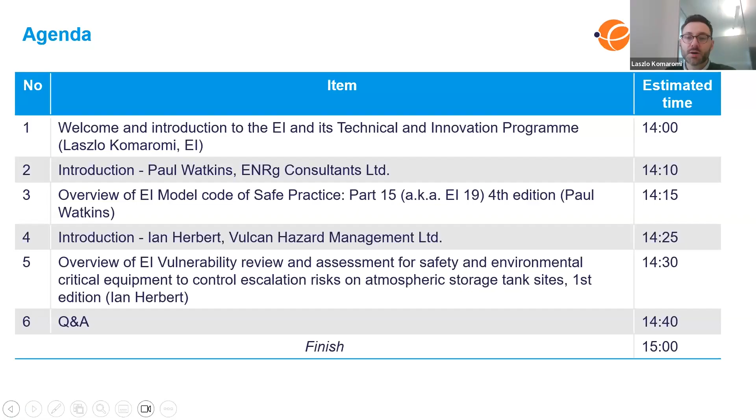Welcome everyone to this webinar on EI's Model Code of Safe Practice, Part 19, 4th edition, and Vulnerability Review and Assessment for Safety and Environmental Critical Equipment, 1st edition. These two guidance documents were published earlier this year, and I will refer to the titles as EI 19 and SECe guidance going forward.

My name is Laszlo Komaromi, Senior Technical Officer at the Energy Institute. I'll be joined by Paul Watkins from ENRG Consultants and Ian Herbert from Vulcan Hazard Management, and they will provide a high-level overview of each of these publications.

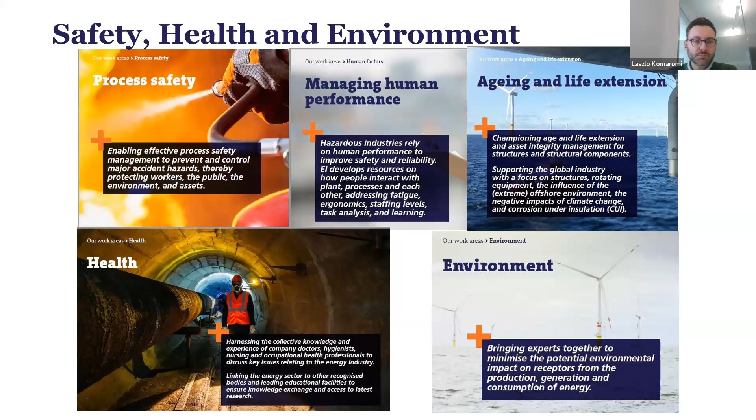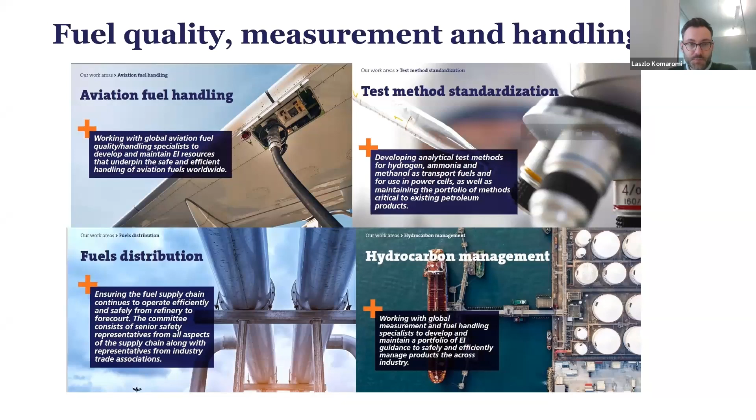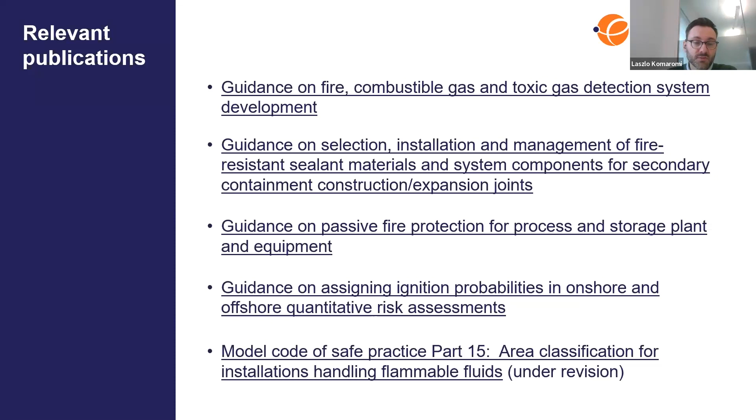They can be found on the EI publishing website, along with other technical publications. And finally, just some useful links for you if you would like to learn more about the EI and its technical products, training courses, membership opportunities. I've also included a link to EI's Toolbox platform, which is a free online resource that gives you access to learning from incidents and other safety information. So please check it out. That's the EI in a nutshell.

Over to you, Paul. Would you like to introduce yourself and tell us a bit about the fourth edition of EI 19? Of course. Thank you, Laszlo. As Laszlo says, a quick introduction. My name's Paul Watkins, independent fire hazard management specialist with ENRG Consultants. Throughout my career, I've been assisting operators in a range of different operating environments to assess and implement their fire and explosion hazard management measures.

That in itself is quite a big part of the document we're going to discuss today, EI 19. With the EI, I've been involved in this capacity, with this particular document, EI 19, really since its second edition, which replaced the old refining marketing safety code. It's really grown as a document - we've added lots of things in recent years. Some of that's come about through incident experience, changes in standards and design codes and those sort of things. Laszlo also mentioned a document about sealant materials for linear expansion joints in secondary containment walls.

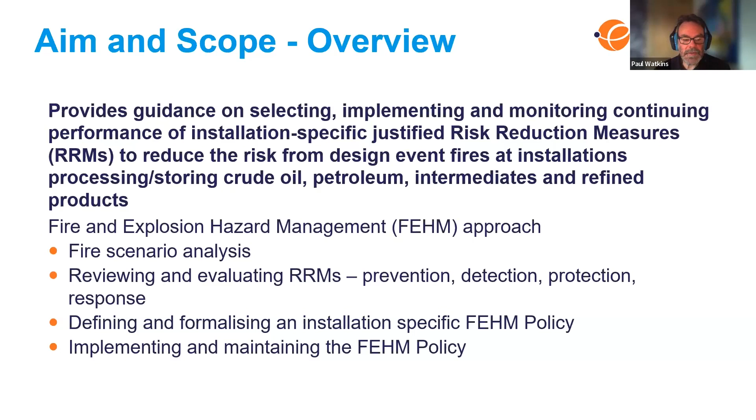This process can be used to help you define and formalize your fire and explosion hazard management policy. So in other words, as an operator, it can help you put that policy into place, to formalize it, and whether that sits in with the legislation in your particular operating environment, or whether it's something that's very installation specific, location specific.

We can use QRA techniques to help us analyze scenarios. Things like consequence modeling can be used later on down the line to sort of establish the potential consequences of incidents. But also incident experience as well, which is a very valuable tool in this process, because a lot of ways of dealing with incidents have come about through successful application of sort of fire response measures or systems and equipment that have been used to mitigate risks.

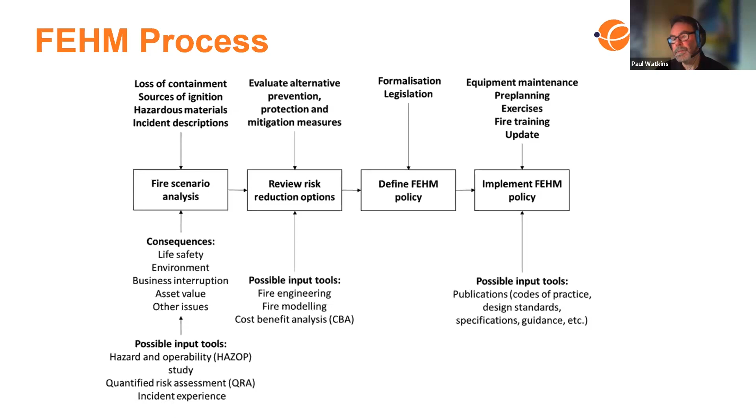So then we need to think about implementing those measures as part of our policy. As I said a few moments ago, things like equipment maintenance, pre-planning, emergency response planning, exercising those pre-plans, and also training personnel become very important.

There are lots of different guidance documents and sources of information that we can use, things like design codes and standards, which we'll come on to in a moment.

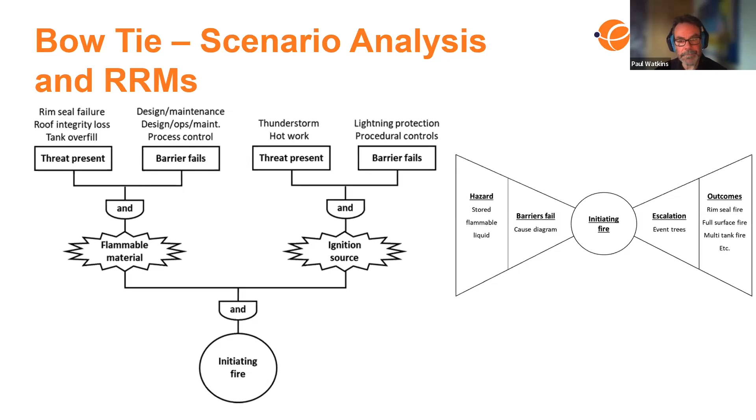In terms of ignition sources that may be present, the two things combined give a fire. We're thinking about things like, is there any hot work being carried out, and is that subject to permits? What about natural ignition sources, things like thunderstorms and such like? Generally speaking, we're trying to look at both sides of the equation - prevention of the loss of containment, prevention of the ignition sources, and the ways in which we can achieve that.

To that end, the document EI19 gives us quite a bit of information on all of these barriers to loss of containment, barriers to ignition sources, and then further on it gives us information on the systems, the equipment, and the procedures that we can implement to mitigate risk.

The document focuses on the selection and implementation of risk reduction measures, and it's important to recognize it's not a prescriptive document. The fire and explosion hazard management process really sets out good practice guidance and principles on those risk reduction options, to assist people like process safety engineers, safety advisors, designers, and emergency responders and planners satisfy pertinent risk drivers within this sort of goal-setting framework that is generally being applied in many locations worldwide these days.

So it's not prescriptive. The document isn't saying you have to put certain measures in place, but it's giving you the tools to assess whether those measures are good for your own situation. And if you consider that they are, then it's giving you guidance on how to implement them.

There are a number of sections on different things. It starts off with sections on the control of flammables, so we talk about things like atmospheric monitoring, flammable vapor detection, flammable gas detection perhaps would be one of those things. Good ignition source control practices, including things like permit to work procedures, maintenance practices, good housekeeping, and also installation layout.

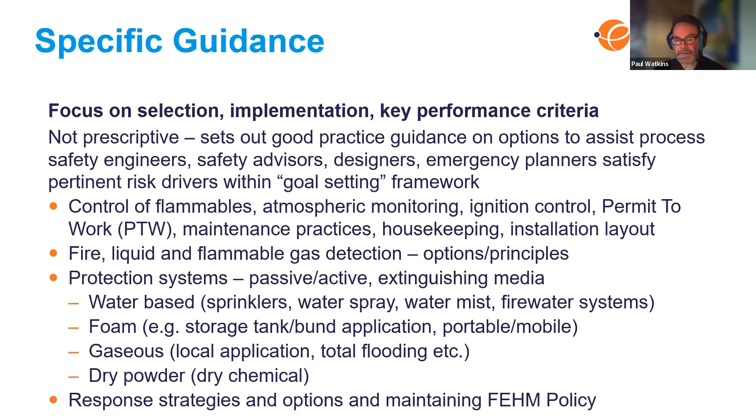Now obviously it's not just all about hardware, it's about response strategies and fire responders, taking into account that fire responders also includes operators as well, and the options available to you for various incident types are outlined in EI19. So there's some really good information on the sort of procedures you might be thinking about in terms of incident response.

There's a lot of supporting guidance for the various risk reduction measures outlined in EI19. First of all, a section on typical legislation and regulations, which sets the scene, the context through which the risk reduction measures and assessment thereof should be looked at, whether that's the COMAH regulations in the UK, the Seveso principles, or the regulatory reform order, that kind of thing, when looking at fire risk assessments for the built environment.

There's also a number of annexes on various topics, and some of these annexes are new, so it's important to know about those. The second and third editions included information on the fire-related hazards of petroleum and its products, talking about fire classification according to the EI classification, and flashpoints and so on.

But also now there's information on things like substances with a propensity to form vapor cloud explosions or result in vapor cloud explosions if ignited. And that really goes back to the post-Buncefield time, when those substances were first identified.

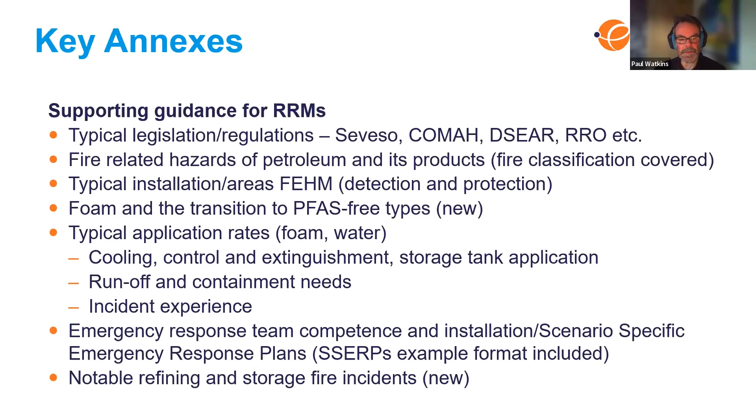The key changes in the 4th edition: first of all, the document is there to provide you with guidance. It assumes that good industry practice is already being followed at a facility, but it will give you additional information, additional guidance that you might need to make your fire and explosion hazard management policy more watertight, perhaps.

There's an increased focus on environmental protection, so a lot of good information on PFAS-free foams, containment options, secondary and tertiary containment options, and assessment of those. As I mentioned earlier, information on substances with propensity to form vapor cloud explosions, so a lot of the information that came out of the Process Safety Leadership Group post-Buncefield is included. Also new technologies are available on things like fire consequence modeling, particularly computational fluid dynamics for explosion modeling.

So if you're thinking about using that, or you're already involved in it, there are some key pointers. It's important to say there are also some local expectations as far as consequence modeling and scenario assessment, so we point those out in EI19. Things are different depending upon where you are in the world in terms of the criteria we apply, and EI19 recognises this.

There's information also on things like crude oil boil-over scenarios, which has been expanded for this edition, and updates on various risk reduction measure technologies across the full FEHM spectrum, particularly in incident detection, where realistically most of the key technological advances have occurred. New information on scenario-specific emergency response plans, things like containment integrity, and looking at the integrity of your secondary and tertiary containment options, with links to guidance including things like CIRIA C736.

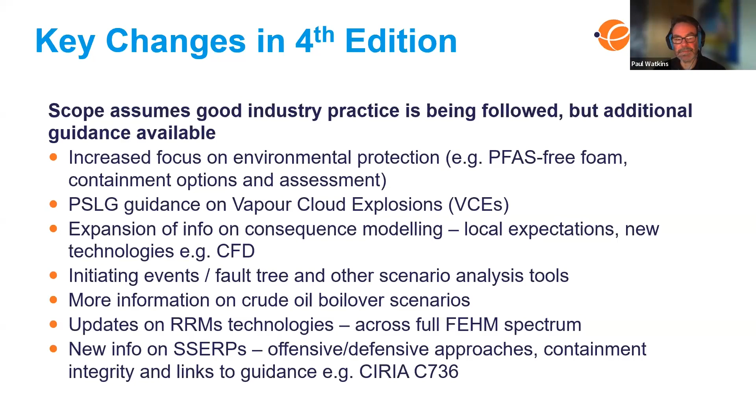So in summary, really the practical use of EI19, how do you use it to help you? You can use it to seek specific guidance on scenario development, risk reduction measures, or the FEHM, fire and explosion hazard management methodology. It gives you information on the key design guides, standards, approved codes of practice that can be used once you've selected your risk reduction measures, which help you design and implement them.

But really, EI19 sets out the methodology by which stakeholders, anybody who operates a facility or is involved with assessing facilities, can look at fire and explosion scenarios, compare those risk reduction measures, define their fire and explosion hazard management policies, and implement them. And once that policy is implemented, you can use EI19 to maintain it, including making sure your emergency response planning is up to date, that your competencies are correct, and that life safety, environmental protection and fire systems integrity assurance are all addressed.

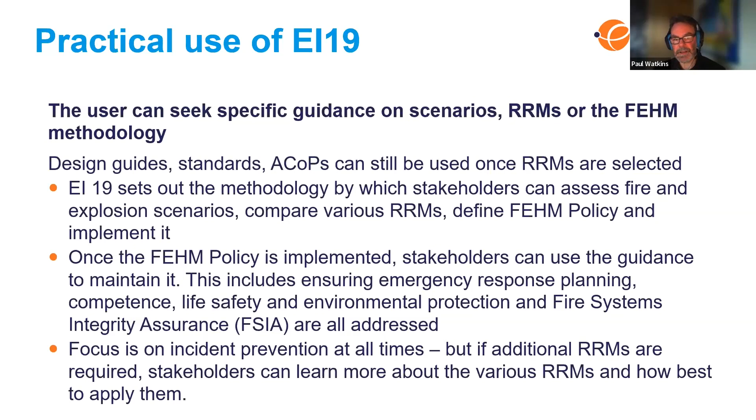I should say the focus really is on incident prevention at all times with EI19, but what we're saying really is if you need additional risk reduction measures to be implemented, if you require those, then you can learn more about those within the pages of EI19 and how to apply them. So really that's the sort of main practical use of EI19.

Yeah, thank you, Paul. Thank you. I think there was a lot to cover, and I think you've done a fantastic job.

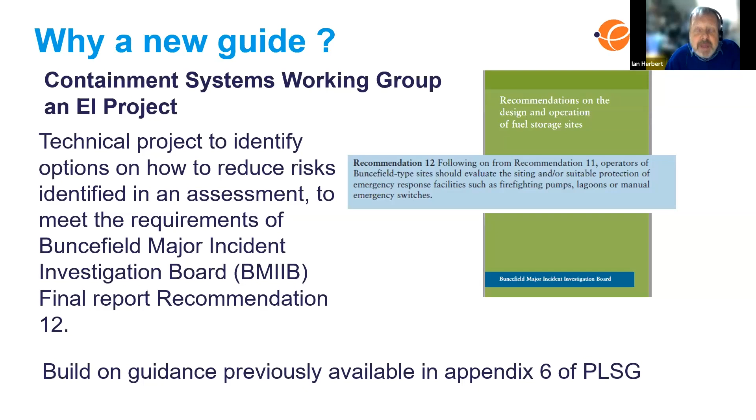So next slide then, please, Alistair.

So what we're looking at, following on from what Paul's mentioned, hopefully you've been doing your good FEHM studies, you've identified your fire hazards, and you've got a large number of systems in there. So we're looking at the standard type of fire equipment, fire water pumps, lagoons for water sources, deluge systems and other ones. But we're also looking at expanding it into other areas. It was not just the fire.

Sometimes we're looking at the bunds that you've used, because that's important for looking at pool fire type sizes, the detection cases, once you've had a loss of containment, access to those, and what exposed tank protection you might need, if any, to prevent escalation to those, such as from overpressure or fire spread.

So it's the equipment generally in there, but it's also to include the interaction from operators in the operation of that equipment. You might have all the best equipment in the world, but if you can't get the operator there to operate a deluge or orientate your monitor correctly, it's not going to work.

What's not being covered in this guide is the original loss of primary containment. So we're not looking at overfill protection primarily, but we are looking at what happens once you've had a loss of primary containment onwards.

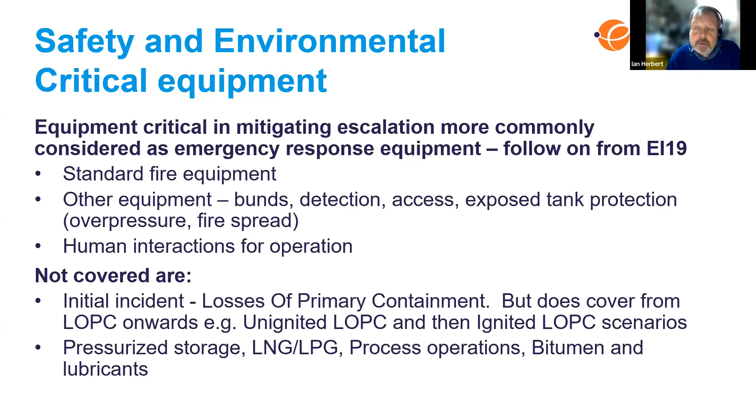We've used the term vulnerabilities to show failures of these safety critical equipment, and you'll notice I've used the small 'e' at the end, because many of you will come across SECEs in terms of safety critical elements—trying to keep this distinguished as equipment items. The main aim of the recommendation we were trying to address was the siting case caused by fire or explosion, thermal or overpressure.

But these are just siting failures with only one failure mode, that of survivability of the equipment to those events causing thermal or overpressures. There are other failures that can occur to these critical equipment items.

We're using the FEHM type terminology—people offshore will probably come across this in developing their performance standards—but it's the function of the equipment. Is it designed correctly to actually respond to the incident? So again, it's linking into what Paul's identifying in the FEHM in EI19, to test it and say, is it correctly designed? I'll come onto this in more detail in a minute.

The other ones are availability. Is it going to be reliable enough? Paul has alluded to this, with maintenance being a key failure mechanism, and reliability part of that as well. So availability—is it down? Have you got enough equipment items? And reliability—is it going to be working when you need it to?

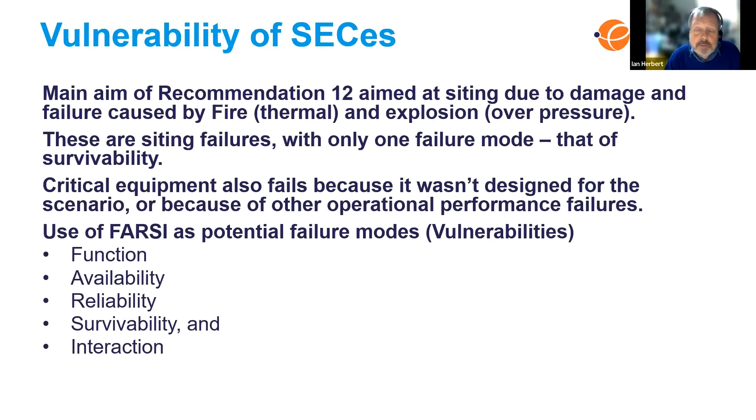So what we've actually done is grouped these into two parts. There's the survivability part, which is the key item we're addressing against recommendation 12, and then we've looked at these other performance vulnerabilities: function, availability, reliability, interaction. As I said, it's not just the physical equipment item, it's how we're actually interacting with it in terms of human failures.

Human failures in function include insufficient training, insufficient PPE so they can't get to it, insufficient knowledge of emergency plans—again, that's key from what Paul's been saying.

Availability in terms of their numbers present and time to mobilize. You might have an emergency plan, but is it designed to be operating with a certain number of personnel on site and emergency responders? Will it work at 2 o'clock in the morning? It's not just looking at your on-site personnel, it might be third-party off-site emergency personnel as well.

Reliability—can they be off sick? What do you do with that? What do you do if they're injured? In fighting the fires, thermal exhaustion can be a big case.

Survivability, we'll come into this one, factors in there. You might not just be affected by the thermal or overpressure cases, but also by the smoke and gases from a fire. So testing it on that.

Interaction - the big one there usually is breakdown in communications and compatibility with equipment and fixed systems, particularly when relying on external third parties coming in and tying into your emergency systems. Will it attach? They come in with 2.5-inch hoses, but you've got 5-inch connections because you've been designing it for a large fire water system - incompatible.

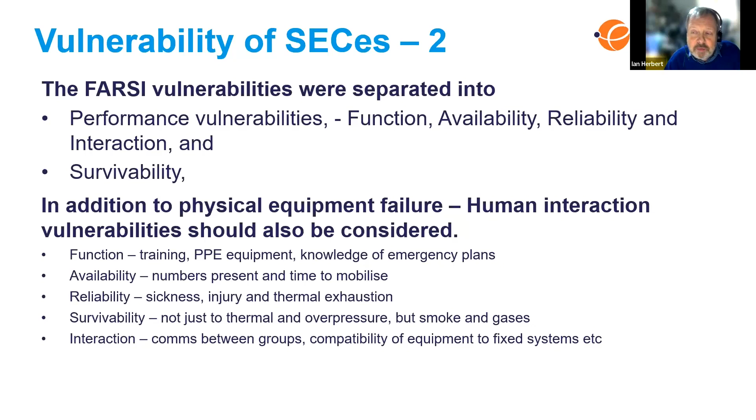A lot of this is developed from different stages, which is a key point. You're developing these equipment items from your fire and explosion hazard management systems, as outlined by the guidance provided by Paul in EI 19.

One of the cases was that the HSE focus, particularly in the PSLG, is largely based on the worst case. So they are panicking now about these large open flammable cloud explosions. But there can be earlier stages.

It can be a single tank fire or a single bund fire, and then it escalates to a multiple bund and tank fire. A couple of cases I can think of: Deer Park was an escalation of one tank to another, multiple tanks going through, or even back - if you remember - a Singapore incident with naphtha tanks, where you had an open floating roof tank that over time spread from one tank to another.

So large atmospheric storage tanks in particular can last several days and have multiple escalation routes, with a number of what I call stable fire cases in that escalation path, where you might want different levels of fire protection systems or emergency systems at those different stages, and I'll show that in a bit more. There may also be other cases presented by the stored material.

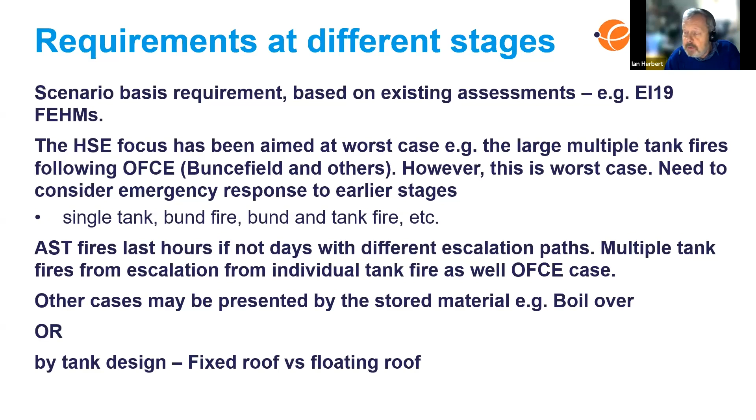Next slide, please. The guide has a number of route maps to show how you can think about escalation at different stages, and then the concerns at each of those stages, because there may be survivability issues associated at different stages.

You might also want to think about equipment needs on site for responding to smaller single bund, single tank fire cases, which you'll want to respond to as a sooner part of your incident planning, and then think about a larger loss of control.

It's escalated to multiple tanks, multiple bunds, and then you're getting the involvement of third parties, mutual aid groups, off-site emergency services, and what equipment do they need to respond to those bigger incidents.

So there's a lot in the guidance trying to establish what equipment and testing you've got at different fire stages, particularly for atmospheric storage tanks, which have been known to burn for several days and escalate over that period of time.

Okay, next slide then, please, Laszlo.

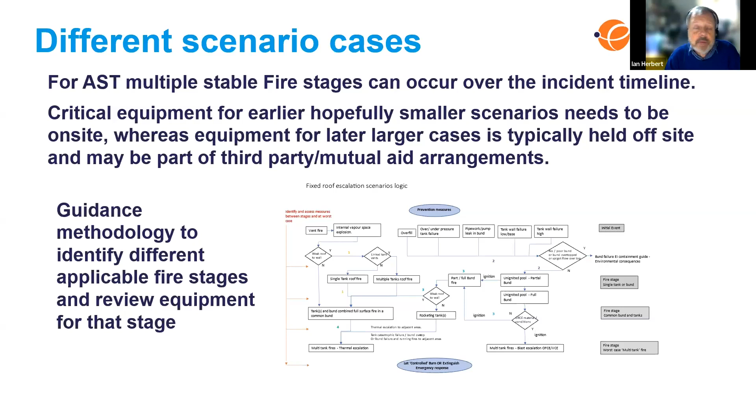That can be used to give you your thermal contours, and you're looking then at whether you've got equipment that could be damaged within those contours. So it's no good having a deluge location or a monitor position exposed to thermal damage to equipment, or also a thermal hazard to personnel trying to access that equipment as well.

So two parts of it - looking at these, there's a question about hazard ranges. One is, can you get escalation from a fire and explosion case that means you need to be thinking about equipment for larger events from those escalation events, and can the equipment and the human interactions survive those? So we've got ignited liquids and vapors, giving you thermal contours, and you've got overpressure and missiles from that.

You've also got smoke and toxic cases affecting human interaction or operation. Basically, on unignited cases, I've talked about EI15 area classification - that's good for normal operations, but has it been considered for an accident or a large case? Thinking again of Buncefield, the possible ignition source was the firewater pump house, which was outside standard hazardous area classifications. Maybe there should be consideration of where you place gas detection, perhaps at the entrance to firewater pump houses, to isolate or stop those operating for larger, non-hazardous-area-rated events.

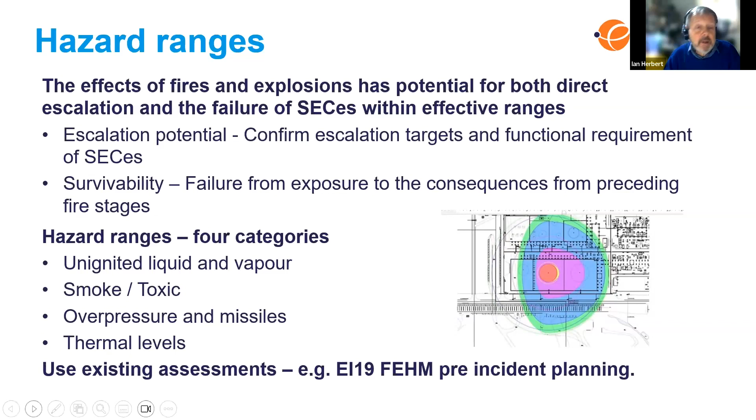So that's the hazard ranges - you're looking at whether it can be affected in terms of operation, or performance failures going through. Can it operate, or will it fail to operate in the set time? Again, thinking about your FARSI cases, and survivability against the hazard ranges.

Another survivability factor in the guidance now, increasingly important, is survivability against NATECH considerations. NATECH is natural events causing a major accident hazard - environmental factors like earthquake, landslip, and in terms of global warming, flooding, high winds, high solar events, long dry periods.

Buncefield was lucky because it occurred in winter. One of the firewater ponds often called upon was reported to dry out in summer months. So have you got firewater sources secure in summer months, or is it contaminated by flooding events? That's another survivability factor included in the guidance notes.

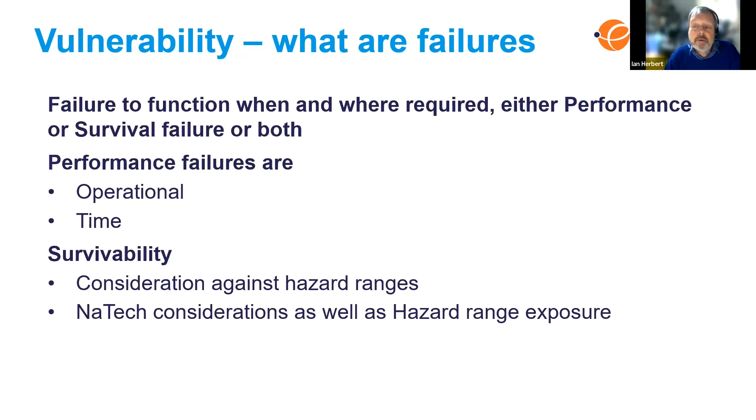Okay, next slide please, Laszlo. Moving on - once you've looked at these and determined whether they're acceptable or not, there's basically a risk assessment case for looking at emergency response plans. It's usually assessed against relevant good practice, for which you can look at the EI19 guide as a good starting point, and your emergency response plans developed through fire and explosion hazard management.

This is being tested now by thinking through the considerations within this guidance note. You're looking at performance failures - can these be resolved? Is it a maintenance issue, as Paul alluded to, or an availability or reliability issue we can pick up on? Can those be resolved? Is it a design issue for different stages? The design might be good for early phase but not good for a multiple tank fire case - do we need other systems to support it?

Survivability - typically, can it be relocated or protected? We might be stuck with an existing site so we can't relocate, but you could think about protecting those cases. If you've got these failures and they still exist, determine whether they're non-critical - i.e., low chance the equipment failure has much impact on overall escalation potential - or if it is critical, think about alternative equipment or emergency plans.

Some of those emergency plans for atmospheric storage tanks go up to and including let-it-burn. You might think we can control a certain number of fires, the smaller ones, but for the larger events all we're going to do is try to control it from getting any further and have a let-burn policy. Okay, next slide please, Laszlo.

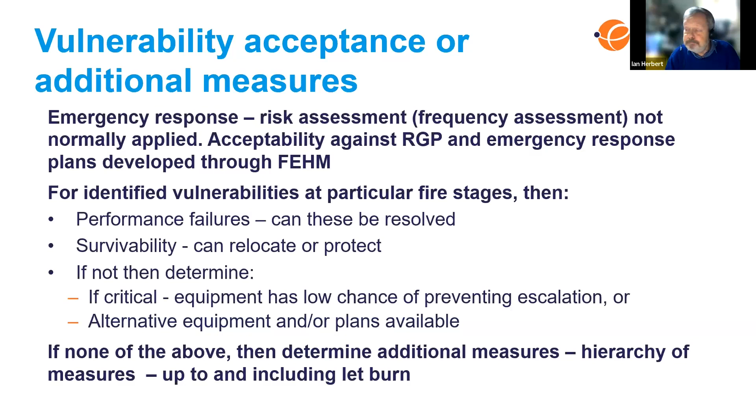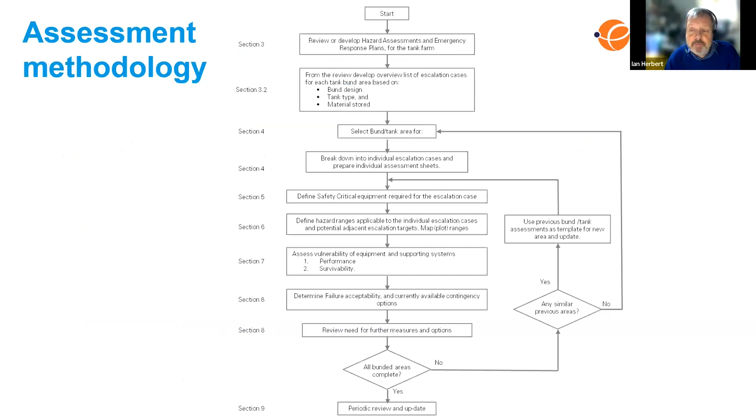This is an extract from the guidance note which shows how it tries to get you to think about vulnerabilities on your identified emergency systems. It's pulled out in more detail in the guide, which has some examples going through that. So I've flown through the key points - next slide please, and I think that finishes me, Laszlo.

So now I'll wait for your questions that you may have on this, or go read the guide in conjunction with EI19.

Right, well thank you for a great presentation. I've got a question - I'll start with Paul. This is about decontamination, PFAS decontamination, and existing firefighting systems. The question goes: do we already have good industrial practice recommendations for system cleanup and acceptance levels of residual PFAS in the last rinse water? That's one for you, Paul.